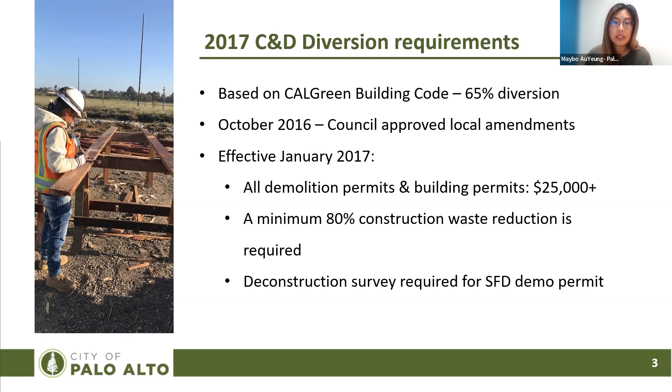A couple of things before jumping into the details: prior to this ordinance implementation, back in 2017, we already had to comply with CALGreen Building Code in California to reach 65% diversion for projects that are whole structure demolition or interior non-structural demolition, as well as anything that is $25,000 or greater in value. In Palo Alto, later in 2017, we actually amended our own code to increase that threshold to make sure projects are reaching 80% diversion. So we had a very good start because of our state building code, as well as our council support.

Going into the waste side of things, because that's where I come from—not architect, not a construction general contractor, I'm learning a lot by talking to people in that industry now—from the zero waste side of things, we did a waste characterization study back in 2017, and we found that 44% of what Palo Alto is discarding into landfills comes from C&D projects.

We have a zero waste goal to reach 95% diversion by 2030. It's also part of our sustainability and climate action plan goal. So we've been implementing a lot of waste reduction and upstream initiatives. And that only means that our diversion, which is a percentage-based goal, is going to be so much more difficult to reach, especially when a good chunk of our waste comes from C&D debris, and it's very heavy.

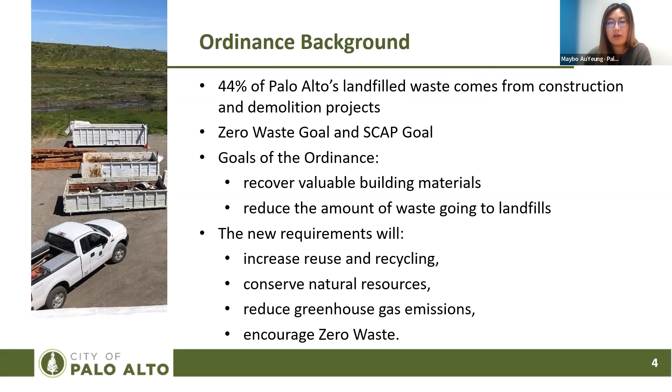So we decided that we could start looking more into C&D diversion, and we started with deconstruction. It's a big change shifting from demolition to deconstruction. So we wanted to make sure that we put things in phases. We wanted to make sure that we didn't affect too many stakeholders.

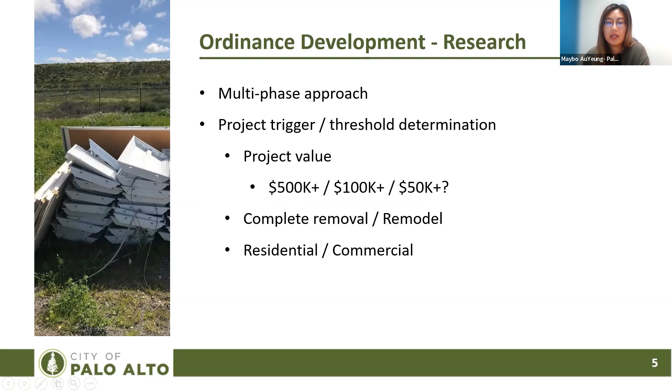So we looked at different approaches on what type of project should be included and required to do deconstruction. These are some of the things we went over. We also turned to our Planning and Development Services Department to understand the permitting process. And at the end of the day, we decided to go with...

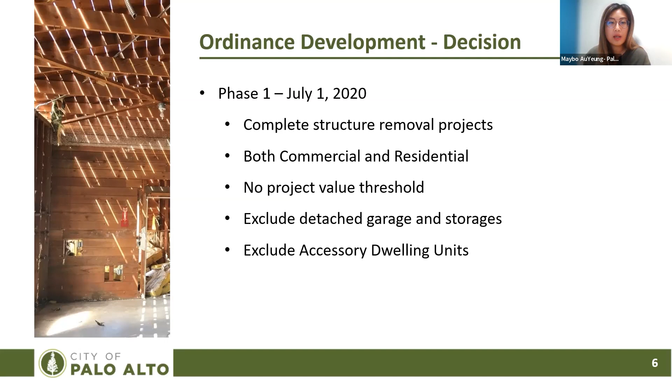all complete structure removal, doesn't matter if they're commercial or residential. We did not have a project value threshold—we don't have it. It doesn't matter the age of the building either, which was something pretty common for other jurisdictions throughout the United States that started putting out deconstruction requirements—they look at that, but we decided not to go for that. We are only excluding smaller detached buildings, so garages, storage, and ADUs.

Our ordinance went into effect July 1st of 2020, so it's a little bit over 2 years ago. Later on, I'm going to share some of our status and data, but that would be for the 2 full fiscal years from July to June, just to share some more complete data that we have collected.

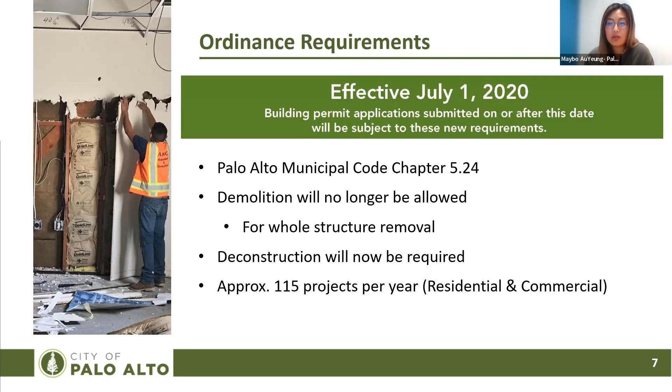Starting July 1st of 2020, demolition for whole structure removal is no longer allowed, and all projects need to deconstruct and salvage, as well as perform source separation, so waste debris sorting on site, and they have to make sure all the documentation is up to date, so that falls under compliance.

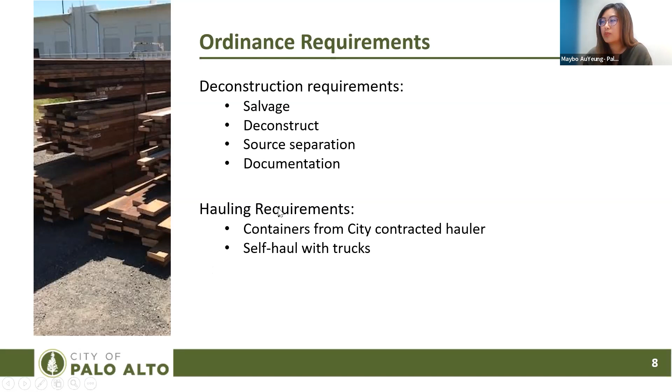Hauling requirement is something that is also required, but that's more related to what type of containers and hauler could be removing the debris. But we'll jump into the deconstruction requirements a little more.

For a project to begin, obviously you need to get your permit application in. As part of the submittals, you need to have a salvage survey submitted, and you cannot get your permit issued without it. This is a survey that a reuse organization will have their staff come on site and do a walkthrough to list out building materials, fixtures, and anything that is of value and have a market to be reused. This is actually a requirement even prior to our deconstruction ordinance, because we want to make sure that our homeowner or project owner are doing this extra step to evaluate what could be salvaged and what could be recycled.

So we can give them the chance to decide, are they still going to go with traditional demo or maybe give deconstruction a try? At that time, if they chose to do deconstruction, there was a time incentive where your deconstruction permit could be issued prior to the new build plan being all ready to go. So it was a good incentive back then. With our ordinance implementation, that is no longer valid. Everybody needs to do the survey and they need to do deconstruction.

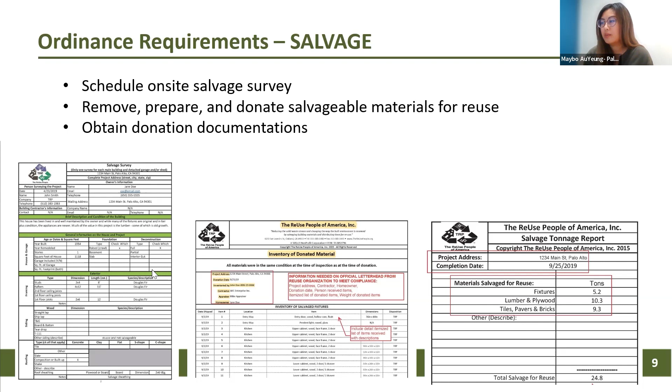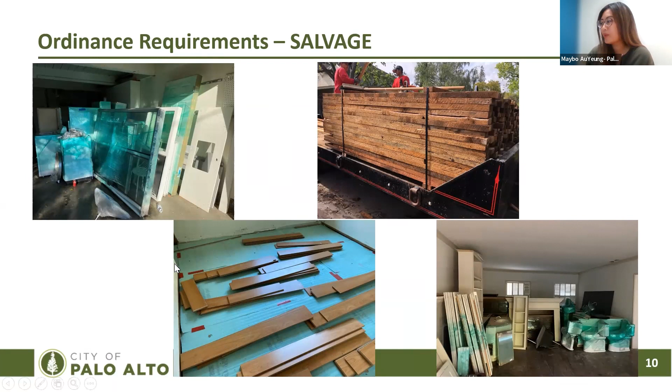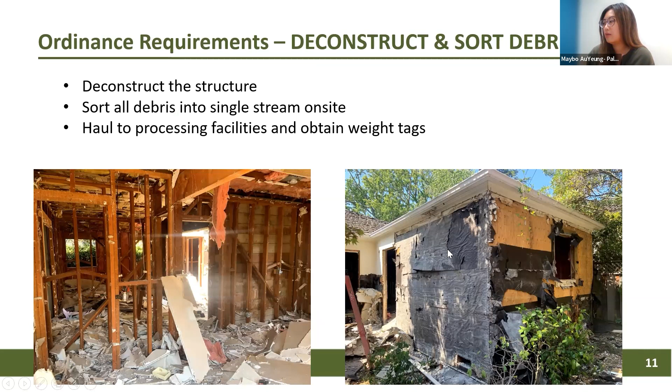Then after the permit is issued and all the inspections are ready, then comes deconstruction. I just have a few pictures showing kind of the process. All the drywall got taken out, the exterior stuccos came out, and then the roofing came off.

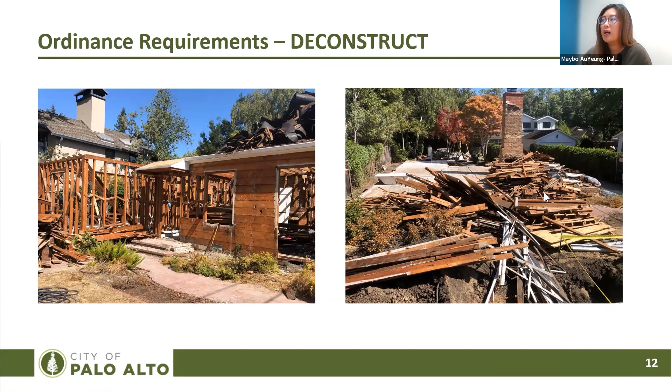So the idea that we have is that not only does deconstruction happen by hand without heavy machines coming in until the chimney is the only thing standing, but also the source separation, the waste sorting on site, is really important. You can see piles of metals, clean wood, carpets and paddings, and obviously there will be some mixed C&D, some trash that cannot be recycled, but everything should be sorted into individual loads because that will greatly increase the recyclability of all these materials.

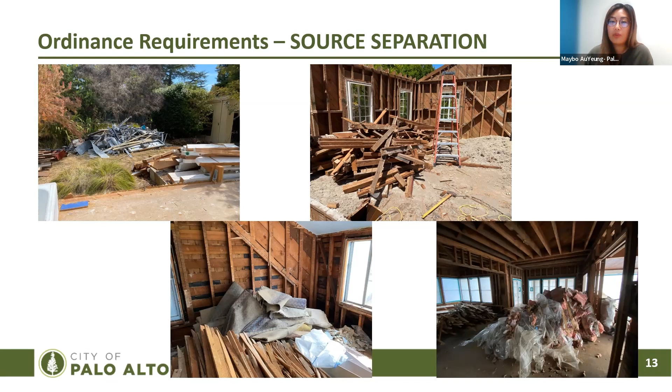Some people argue that their whole mixed C&D box can go to a facility and they sort it really well and reach a really high diversion. But we think that's not good enough, and we can do so much better if the sorting happens on site. Therefore we made it into a requirement.

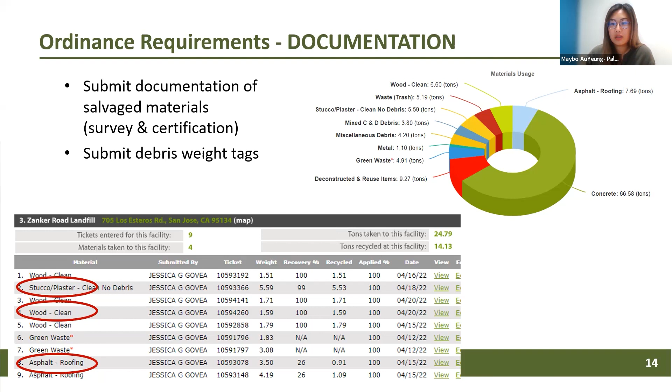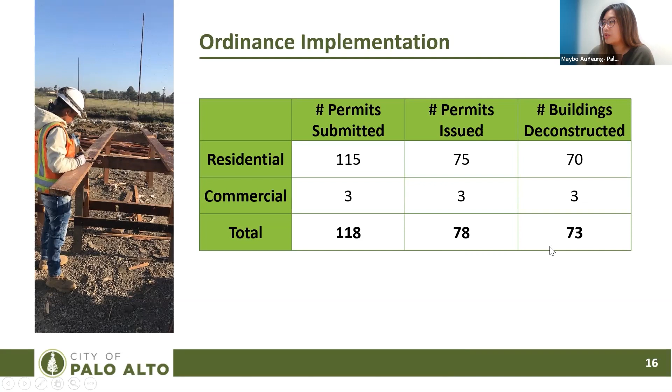And that's something that we're focusing a lot on this year, starting in July. So here's some numbers for the last two years. There were about 118 permits submitted, 78 got issued, and 73 of them got deconstructed or removed.

Most of our projects are residential, and concrete made up a really good portion of the waste stream. But if we take that out, salvage actually reached about 16%, and recycled would go up to 61%. So that's something we wanted to share.

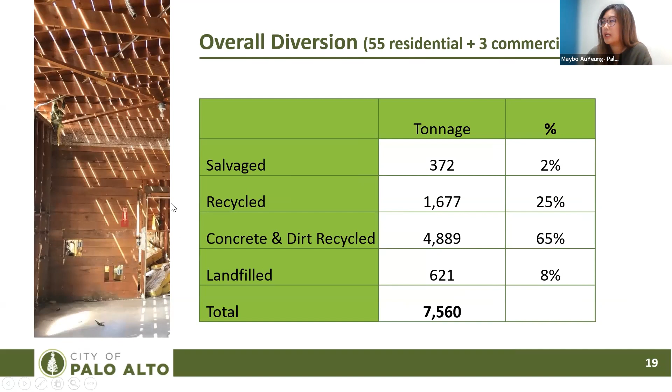I'm not sure which picture to go to, but here are some numbers for all 58 projects that happened during the 2-year period I had mentioned.

I can go over this also, but I want to make sure I have time for our next speaker and Q&A as well.

As a municipality, it was very important that we had council support and resident support to put this ordinance together. We also had multiple meetings with stakeholder groups, general contractors, architects, and designers. We looped them in at the very beginning, let them know this is something we want to do, this is the end goal, and asked how we could put this ordinance together so it would be more achievable, broken down into phases.

Since then, we put that ordinance together, and it's been really helpful for us to work with our hauler and the facilities that take in most of the C&D debris locally. We put together outreach and guidelines on what could be sorted together in one load, or things that must be separated. That was really good.

From our end, we've been hand-holding every single project that came through, all 58 of them. It's been really helpful because even though some contractors may have been doing deconstruction, the source separation piece is still very new, so we're making sure they understand our expectations. We're there to help them and answer questions.